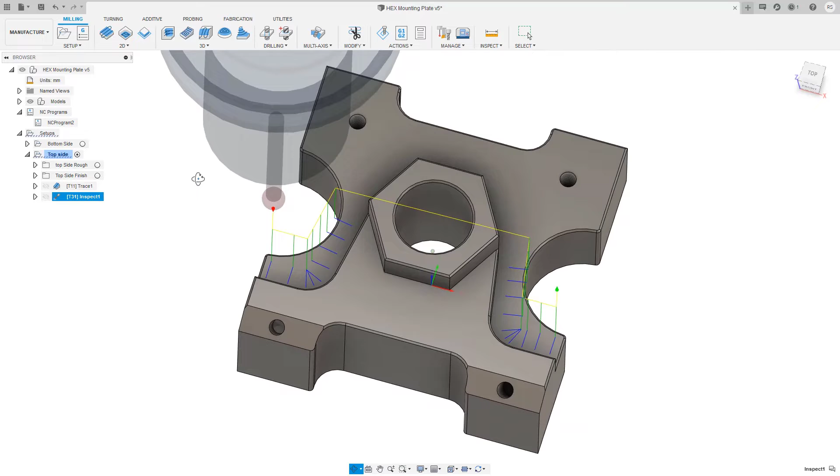We now need to define our measurement sequence. We can see here the inspect surface toolpath looking at the more freeform surfaces. But we want to define manual inspection items for the geometric features on the part. Remember, this functionality is in preview, so you'll need to turn it on in your preferences first.

Now manual inspection is active, let's head over to the probing tab, inspect, create manual inspection. This is going to allow me to select different surfaces on our part to inspect. It places the nominal dimension on the component that can then be adjusted to your preferred location.

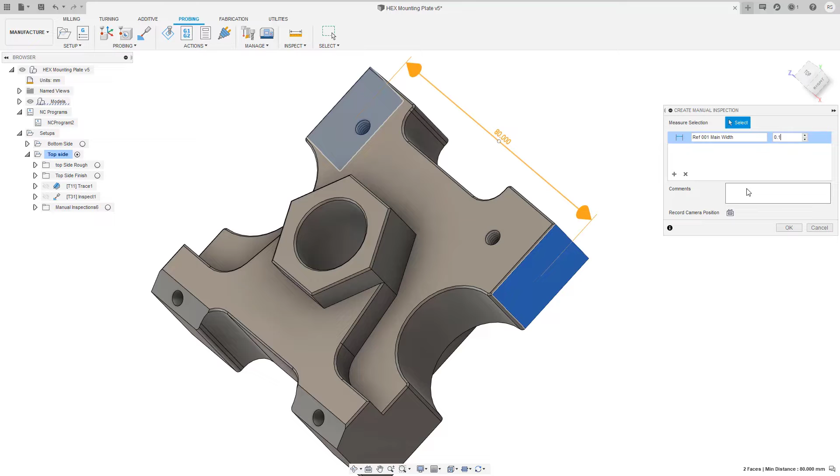Let's give it a meaningful name, apply the correct tolerance, add any comments, and set the camera position. This is where the view will be oriented later when we're inspecting the part. I'm now going to follow my drawing requirements and set up the full inspection routine.

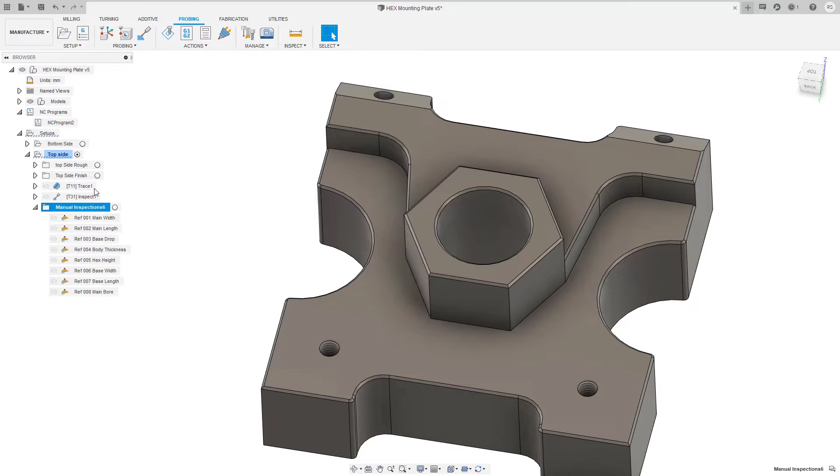My inspection routine is now fully defined. I will run the inspect surface toolpaths on the machine before it has been removed. Then we will inspect all of these additional geometric items with our hand tools. Now our inspection routine is fully defined and our machining cycle is finished. Let's go grab the part and start to inspect it.

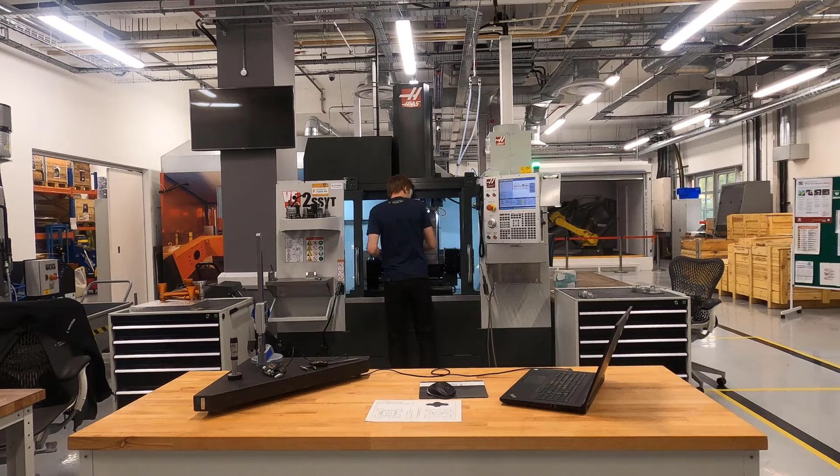Remember, when removing parts directly from the machine tool, make sure to remove all the swarf and give it a quick visual inspection as well. Swarf can cause huge problems when inspecting components. So we've got a range of equipment here today.

We've got Bluetooth calipers. So these are going to actually measure the component and then send the data directly into Fusion 360. We've got a wired micrometer that's going to do pretty much the same thing. We've got a digital height gauge, and although it's digital, it's not connected, so I have to manually type the data across. I'm then going to have to try and remember my college days and how to read a vernier scale, as we've got an analog bore gauge.

So we did some inspect surface probing on this before we removed it from the machine tool, so let's quickly import those results like we normally would. So again, probing tab, actions, import inspection results, click on that first off inspection, and select those. We can see here that we've got one point there that's a bit of cause for concern, but let's carry on inspecting our part completely.

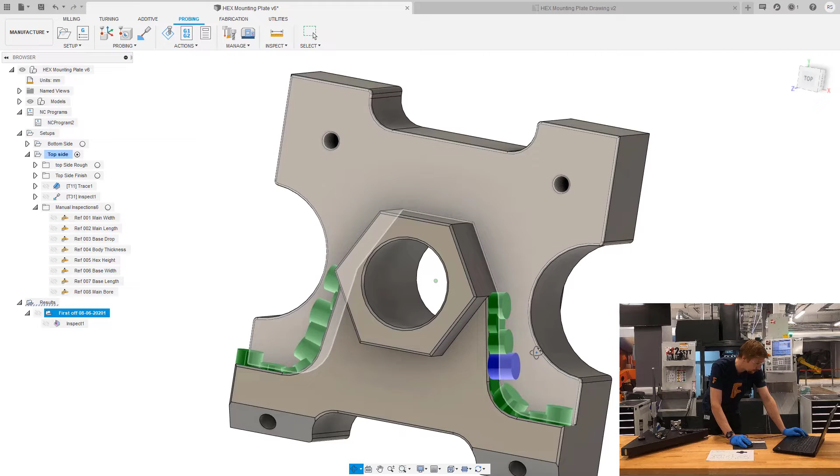So now I'm going to select my folder with all the manual inspect items in, go to inspect, and record manual inspection. Perfect. I can already see the view orientation has changed. It's facing me. I've got my comment there telling me to use the calipers, and I've got the nominal display already. The one quick thing to mention is because I've already got some inspect surface results imported in, I just want to change the measure to that first off inspection report.

This then just means that rather than making a new measure, it's going to put them in the same folder as the inspect surface results. So perfect. Always check your device zeroes out correctly. Now I'm going to hold it in the correct orientation as shown on the screen, measure the part, and press that data button. It's instantly changed to the next feature. It's got my nominal displayed for me as well.

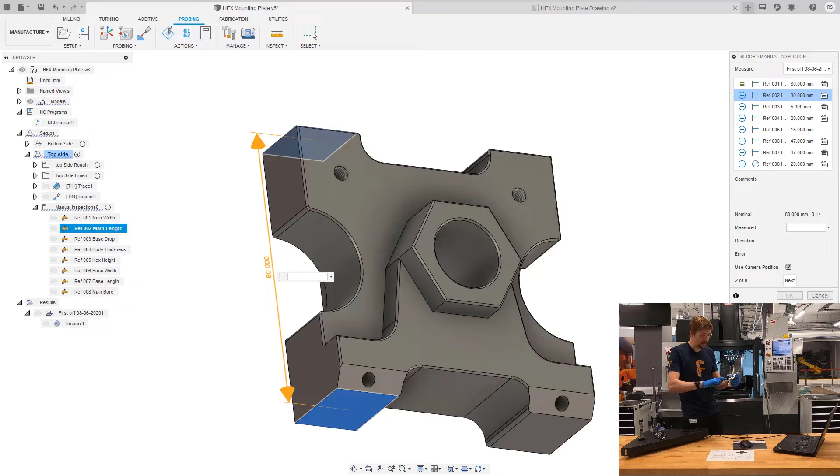Now to use the height gauge for this measurement, it's the drop between this face and this face. Again, most important thing, zeroing it out correctly. And that's 5.03.

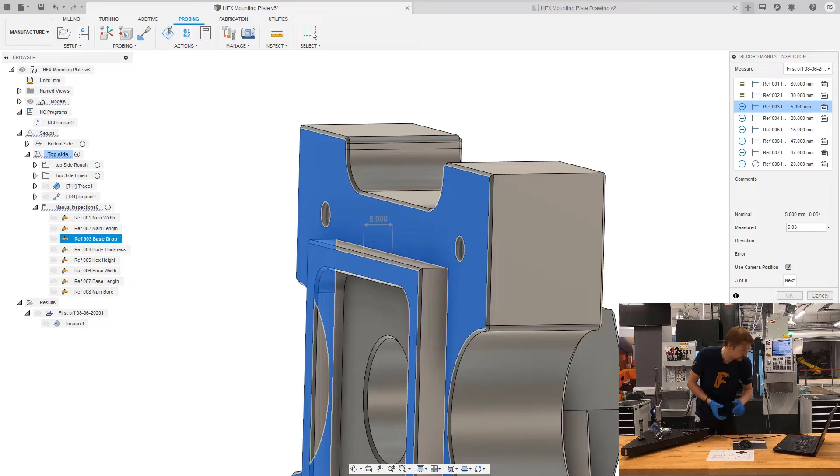Now, the thickness between these two faces, I'm going to use my micrometer for this. Again, much like the Bluetooth calipers, take the measurement, hit the data button, and that information instantly gets transferred into Fusion 360. I've now got the drop between here and here. 0. And that's 15.01.

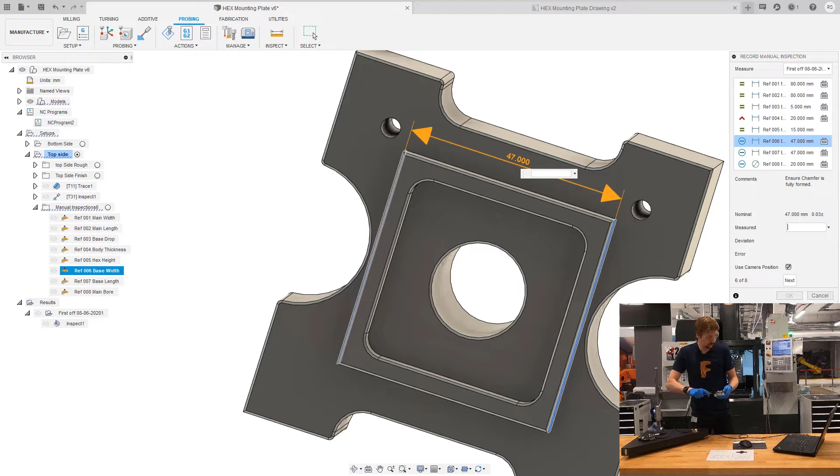This rectangle at the back. And now my bore gauge. And that is 20.03.

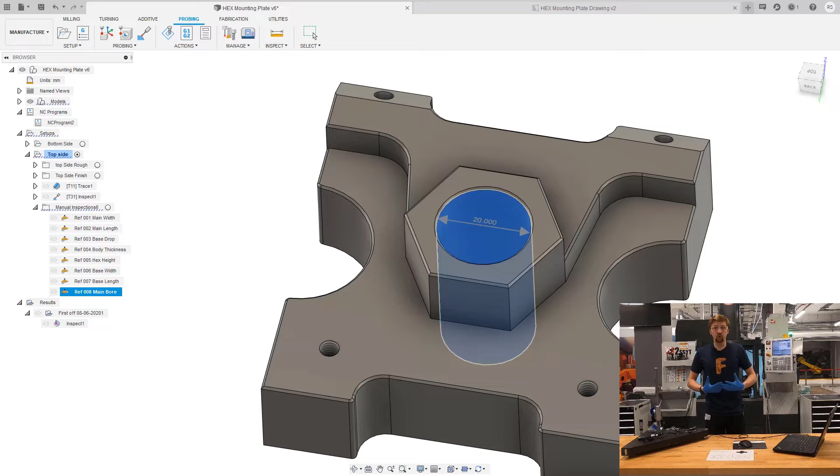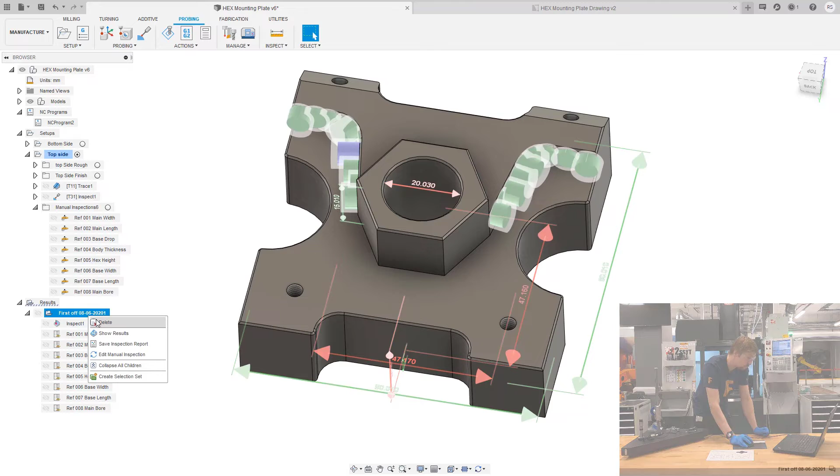So we can see there that that was a really nice, easy process. It was very prescriptive. It was talking me through, changing the view, showing me the nominals. It really just removed any of that ambiguity that can exist in the inspection process. So I can see everything now. I can see my inspect surface results. I can see my manual measure results. And I can look at these inside the products with the show results page.

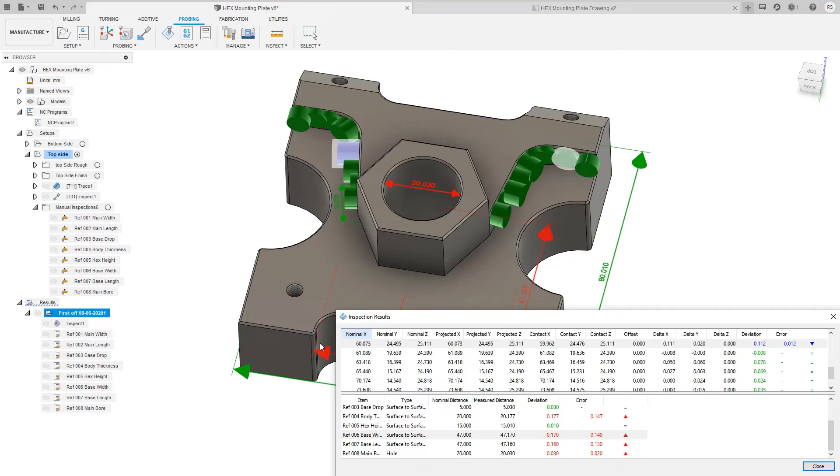So let's have a quick look at this one there. How bad was that one? That was 12 microns below my lower tolerance, which was 100 microns. And then I can have a quick look at my inspect manual measures as well. So it looks like that base rectangle has got a problem as well. Both of those there are out by about the same amount. So I probably need to do a bit of tool wear compensation to get that back in again.

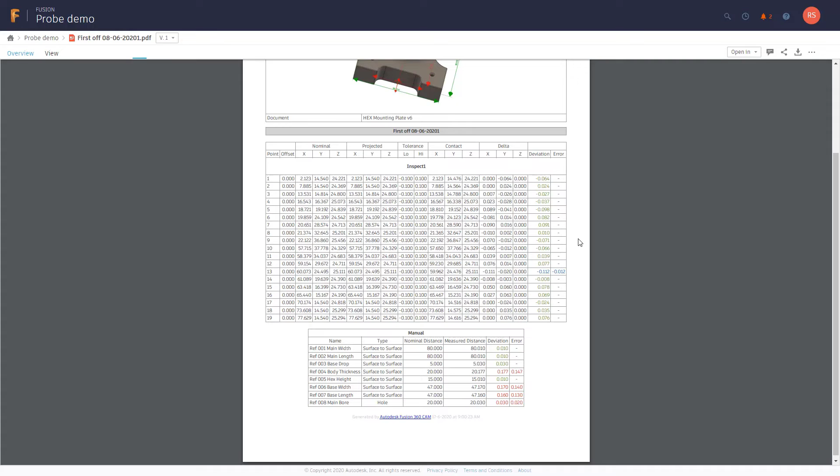Another thing I could do here is I could actually save inspection report. So that's going to now go to Fusion Team, and it's going to put a 2D inspection report on the cloud as a permanent record. That's for anyone else in my organization that needs to look at it, or maybe even a customer that's going to want to look at this part before I supply it to them. So that's really nice to have that permanent record of that part in its current condition.

A top tip here is that the CAD view taken at the very top header is actually set when you hit that right-click Save Inspection Report. So remember to pre-position the CAD in a position you want it to be in.

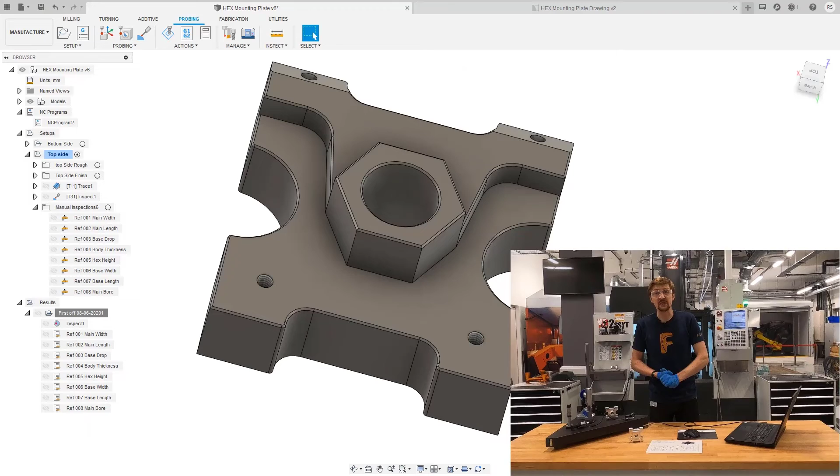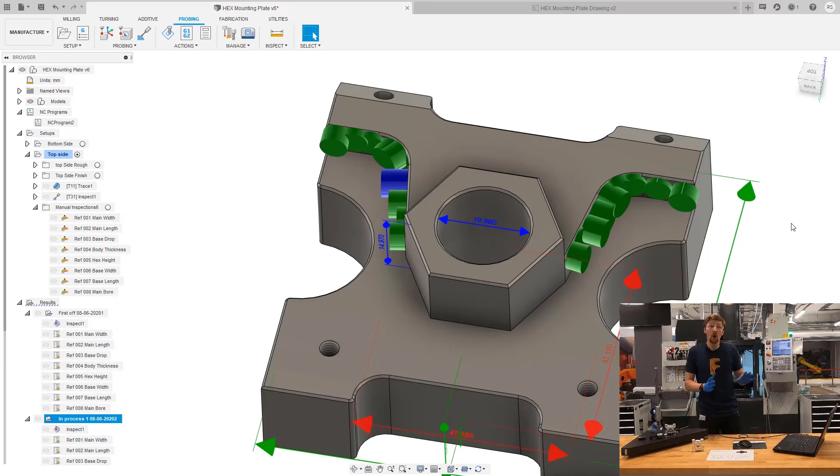So what happens when I've got another part? Let's say I'm inspecting every part or periodic inspection like 1 in 10 or 1 in 25 throughout my shift of production. Well, much like the process before, we're going to import the inspect surface results, and then we're going to quickly use our measurement equipment here to complete that inspection routine. Perfect. So I've now got 2 measures, each containing the individual measurement results for each of my parts. I can save those out as permanent records, or I could just leave them inside of Fusion as well.

So again, this is a preview functionality. We are working on it. We're really excited about some of the ideas we've got for going forward on this, but please give us feedback. We really appreciate it, both positive and constructive criticism.